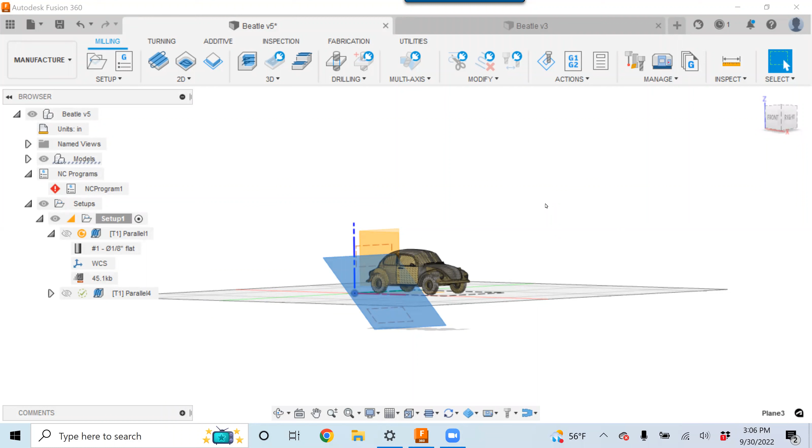So what we are going to be looking at today is finishing off some of the tool pathing that we created a couple weeks ago on this VW Beetle. The last session was on 3+2 machining, and we are also going to be looking at 3+2 machining today. The difference is a couple weeks ago it was only on work planes that already exist, not off on different angles. So we're going to learn how to put in a work plane like this and then constrain tool paths to only get within a certain area.

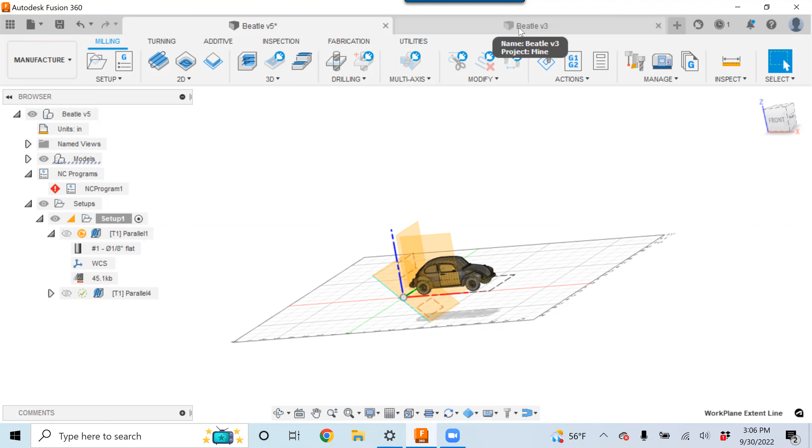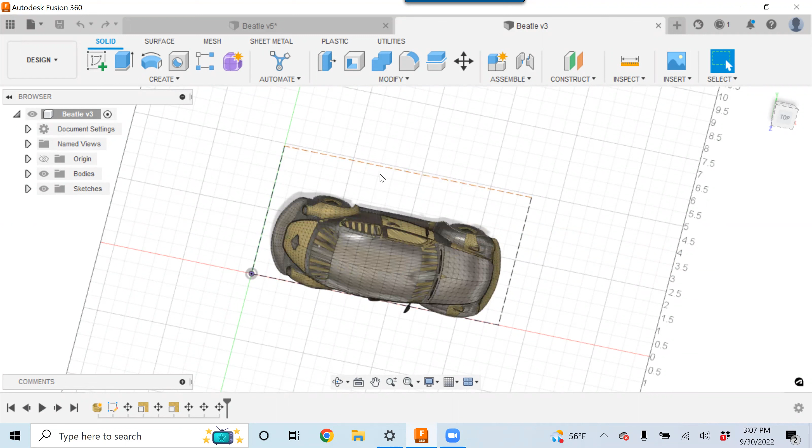Before we jump into learning that, I'm going to come over here and look at what we did two weeks ago and kind of refresh. We started in the design process on the design window. We sketched out a box on a sketch, and that is a construction sketch, used so we could scale the 3D model down and get it to fit within a size that we expect it to be.

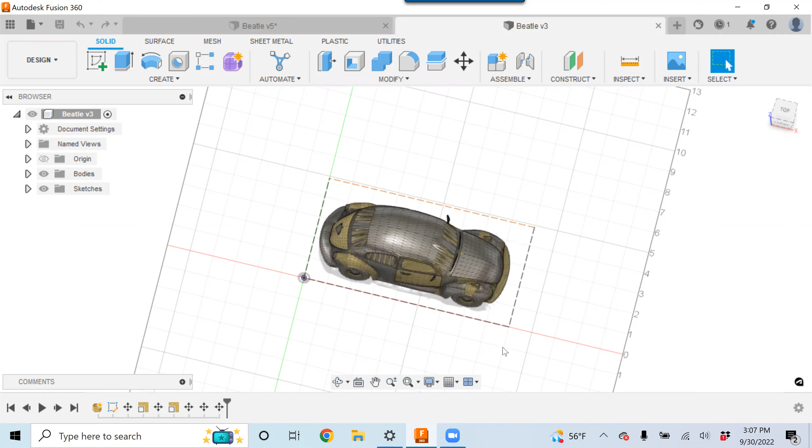When we brought this model in, I think it was full scale, so we shrunk it down using Modify. Under Modify, there was Move and Scale, and we stretched that down to fit. We then moved it into a position closer to XY0. Not that we have to do that—it's just nice to have it in an orientation closer to 0 for when you're panning, moving around, and rotating.

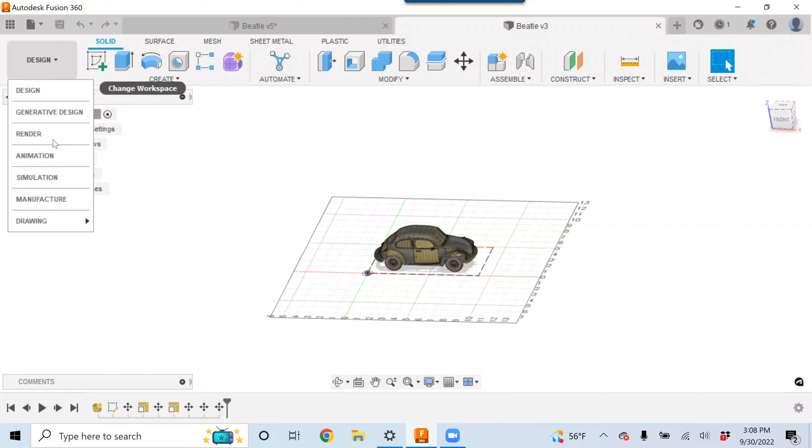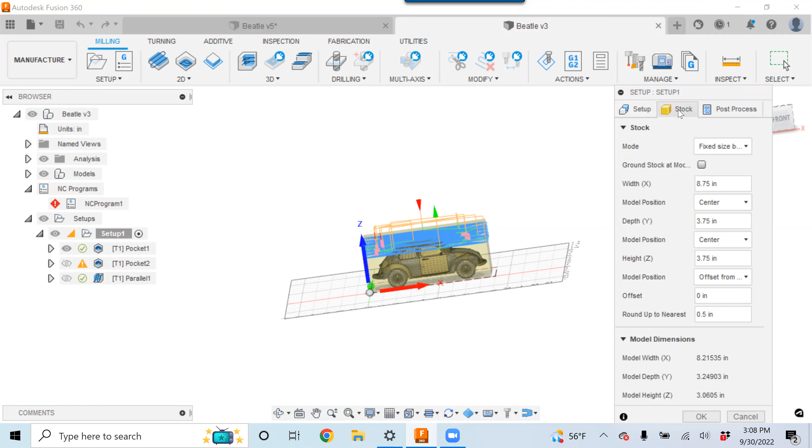Once this was brought in, sized and moved to the correct location, we jumped over into the manufacturing aspect of Fusion. This is where we added the setup—the material we're going to be cutting, the stock size. We're able to change a few things; the stock is primarily what you're going to be working with in the setup. Then we went in and created a couple different tool paths for this.

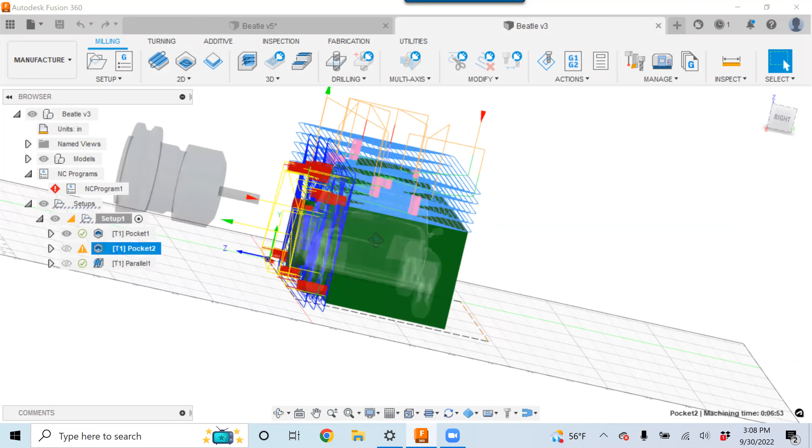We did a top-down pocketing roughing toolpath, which basically roughed the cut out. Looks like we did the same thing for the side. Then we did a parallel finishing, and I can see that finishing right now probably didn't give us the smoothest cut, because I'm able to see the spacing of these lines, which is what's going to give us the resolution. These blue lines are where the center of the cutter is going to follow.

We do have the simulate feature under right click, then simulate, and go ahead and hit play. We'll see what this looks like when it is done.

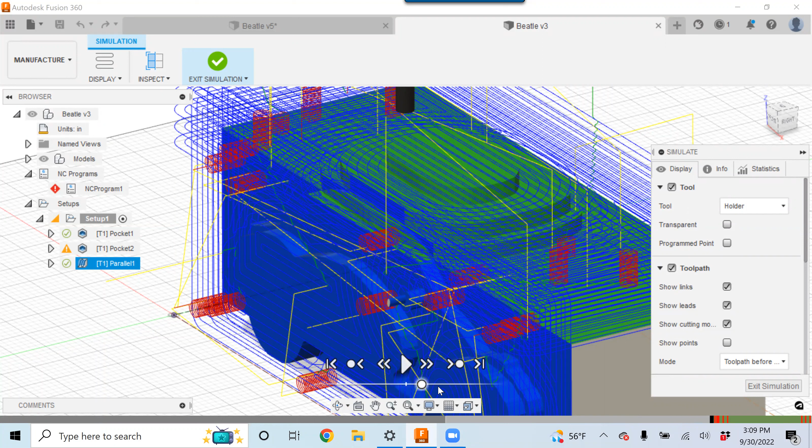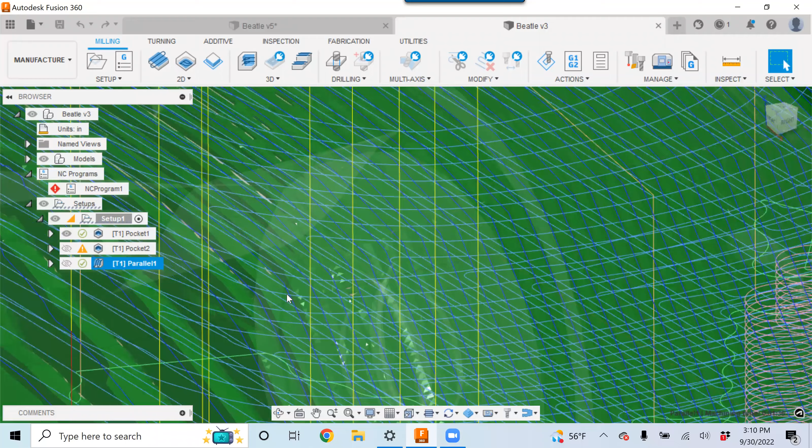Let's see if we can still see it with it turned off. No. So you can kind of see it a little bit—we're getting gouge marks, and it's just not very smooth. That is done within the step over of the tool path. The tighter these lines are together, the smoother the overall finish is going to be. Typically, you want to make that 8 to 10% of the diameter of the cutter.

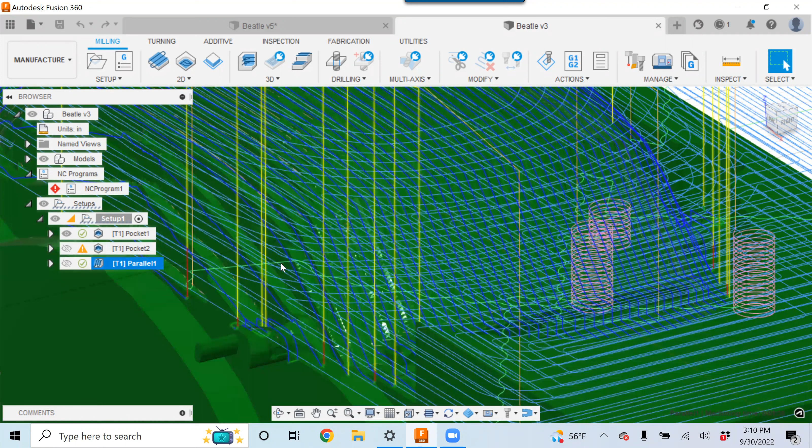So to change that, we're going to double click in the parallel finishing to open up our settings here. We have the passes, and it is the step over right here. We're cutting with a 1/8 inch cutter, so it's only stepping over like 50% of the cutter. We want to get a much smoother finish, so we'll go 10 thousandths.

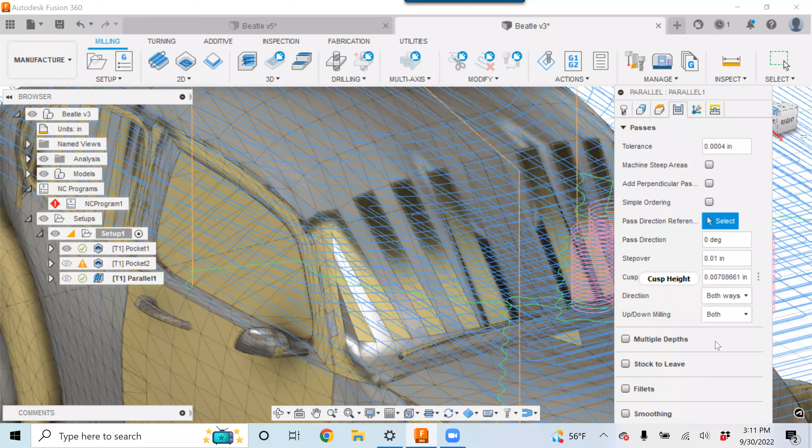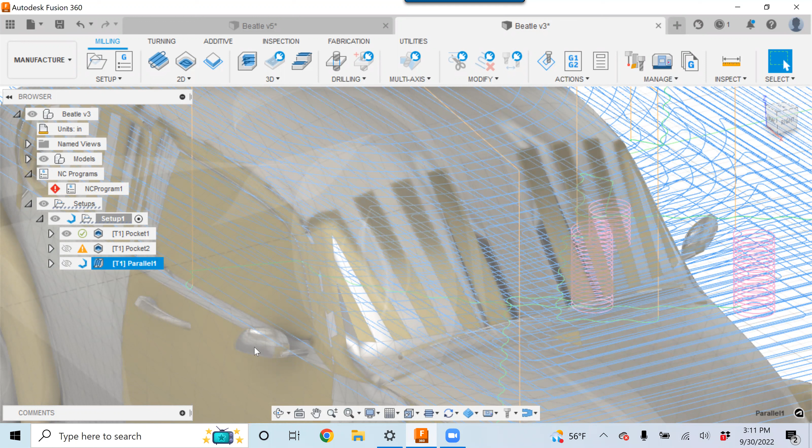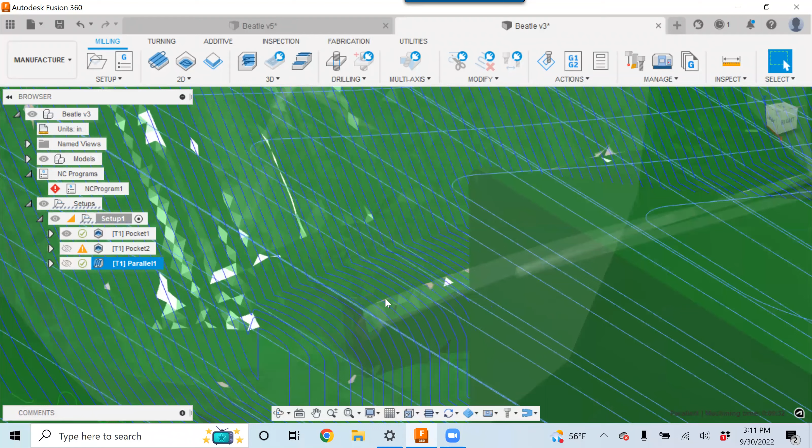We'll say okay to that. It's going to take a little bit longer to calculate, and by putting that closer together, it's going to take longer to cut, just because there's going to be a lot more miles that the machine has to travel to get a smoother finish. So there's a trade-off between how long it takes to cut versus how long you might do some handwork on it. Now we can see those blue lines are very tight together, which is going to provide a much smoother, cleaner look on the toolpath.

So let's see if we could simulate this. There's probably a way through one of these visual settings to hide the actual toolpath lines, but a couple things I want to point out: it's much smoother across the face over here, but as it came up across the side, we have a lot of steps created here.

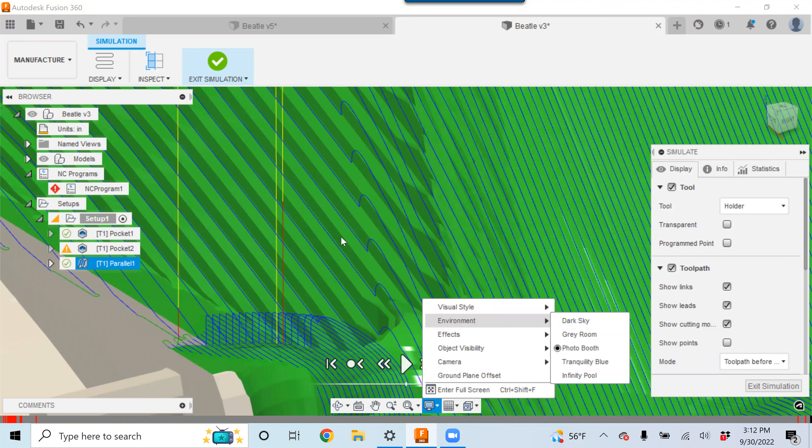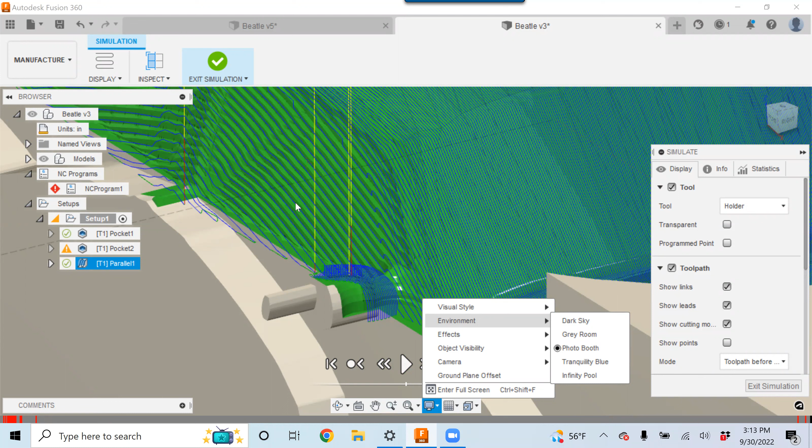Those steps are only 10 thousandths of an inch between this step and that step, so a quick sand would probably take care of that pretty easily. But the reason we're getting these steps up here and not across the face is we are using an end mill, not a ball nose, so we're getting a stair step effect as it travels up the side of a vertical wall. If we used a ball nose, we would get a smoother finish across the vertical walls here.

We might possibly get more of a scallop across the horizontal roof in the face of the windshield. The reason for that is the end mill is using more of the leading edge of the cutter rather than the ball nose just using the very tip of the cutter. So depending on what type of orientation you're rastering in, you'll get a smoother finish than the other.

For example, if you're going forward and backwards across the side of the vehicle, traveling from driver's side to passenger side and back, we would get a much smoother edge, not stair-stepped along the vertical walls on the sides of the vehicle. But coming up the windshield, we would get those vertical stair-stepped type of lines.

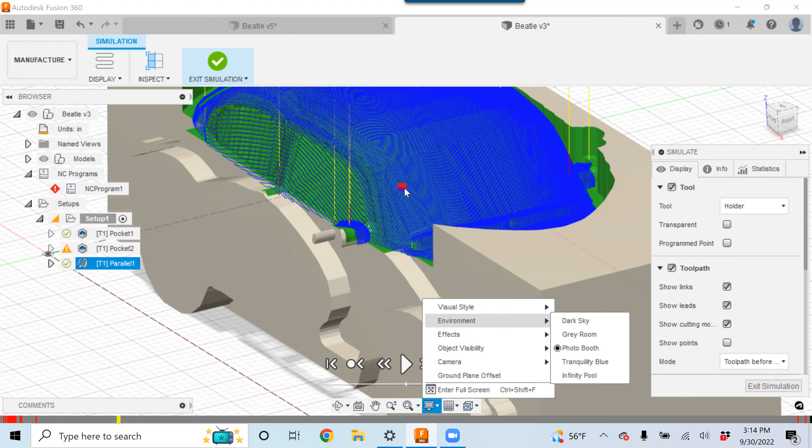So don't always think that a ball nose is the best option. Sometimes an end mill works very well for creating a tool path on an angle, especially since we have the ability to change the approach plane of the cutter.

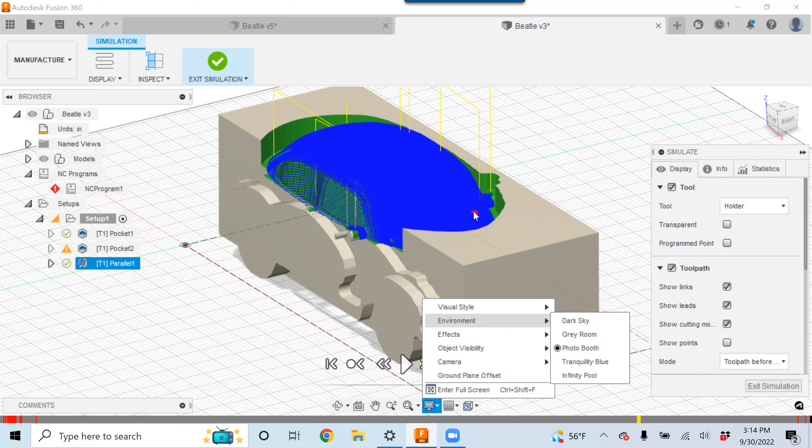What we're going to take a look at is how to create a plane across the front windshield and also create a 3D tool path on that angle if we used an end mill that's keeping the flatter surface of the model in the same orientation that an end mill might be.

So I'm going to exit the simulation, and to create a work plane, there's several ways of doing it. The way I go about doing it is going to the design. And right now we don't have any of the views turned on.

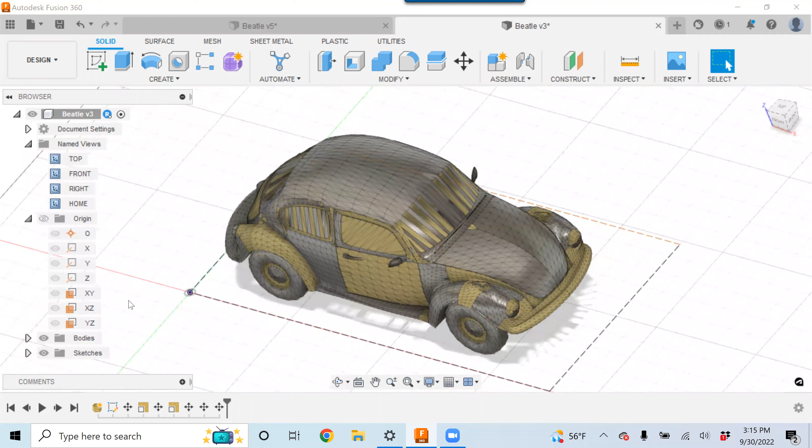So this is the X, Y, and Z planes that are showing up. And what we want to do is create another plane that is off on an angle to one of these. We are able to do that by going into construction and then plane at angle.

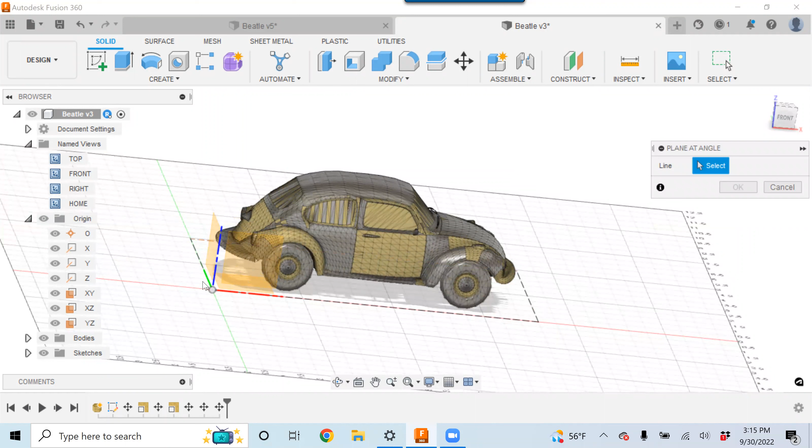It's wanting us to select an axis or a line to create a plane on the angle at. So if we select this Y axis here, it gives us a plane, and then we could use the rotate here to view that. I'm going to click on front, and just kind of rotate this around to somewhat match the angle that we have on the front of the windshield.

Or if we wanted to do it across the backside, setting it on that angle there for the backside. And we might go ahead and do both.

Yeah, all right, sorry about that. Put this on pause for just a second, I forgot to turn volumes down.

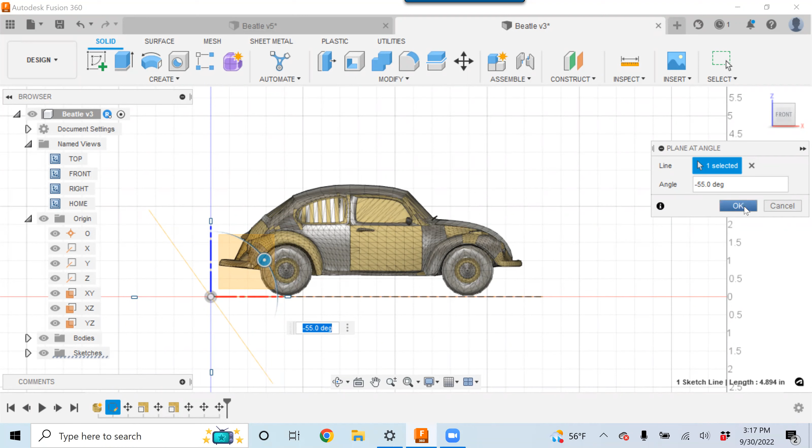All right, so now that we have this plane on the angle that's somewhat matching the windshield here, I'm going to go ahead, okay. I'm going to just make a mental note that it's also at a 55-degree angle. And we'll say okay to that.

Now that has given us a work plane that we're able to use to create a sketch on top of. So to create a sketch, I'm going to select that plane. You don't have to select the plane first, there are two ways of doing it. I usually select the plane first, then come up to create the sketch.

And it just kind of rotated that around to where the sketch is the horizontal plane now. This is the orientation that we are going to align the Z-axis to, so we were able to cut essentially straight down on it as if we rotated the model itself on the machine. You'd be able to do a very similar thing on a 3-axis machine, where instead of just reorienting the work planes as we're doing, it is the same as re-indexing, taking the material off and rotating the model on the 3-axis machine and doing it again in 3-axis motion.

So I do want to create a toolpath to only cover the windshield section. And to do that, with that sketch activated, I'm going to come up to sketch out a 2-point rectangle.

And for the line type, I'm going to set that to be a construction line, and just come in and sketch out a rectangle based on the size of the windshield.

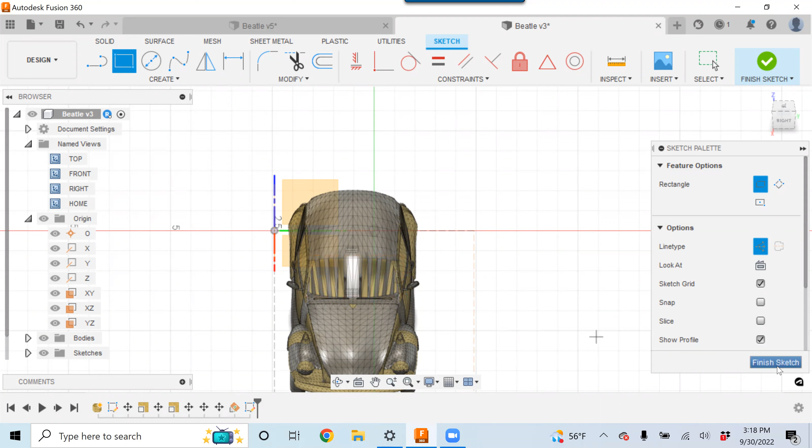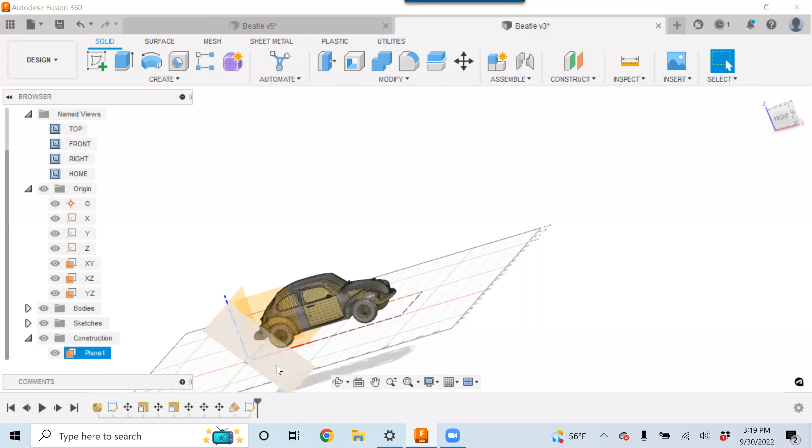Basically that is going to become the containment rectangle for the toolpath that we're going to create. So that rectangle is created down below on that work plane that we have just created, and that is found under the construction options here. We could see that there, that is the rectangle that we just drew that is matching up to the size of that windshield, or roughly that size.

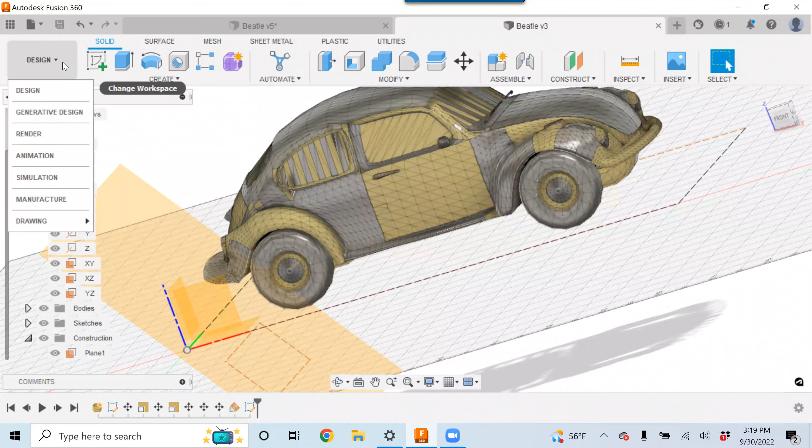So once that is done, I always like to come up, file, save, just in case something goes wrong. So back into design, manufacturing.

And we're able to now select that work plane to create... got a mouse button that is stuck, sorry for that.

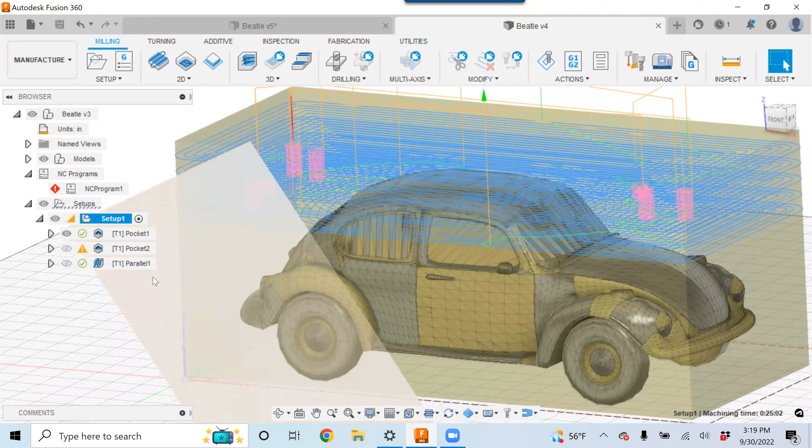To use to set the angle of the Z to the work plane. So we're going to go ahead and create a 3D parallel finishing. This is the same one that we just modified the finishing for and created that step over closer together.

The first thing is going ahead and selecting the tool, which is already a tool selected there from a previous job in the tool database. As I mentioned in the last video, the overall length is a critical real number that you're going to have to get off the 5-axis machine by running the routine called get tool length, and then enter in that overall length here. That is what tells the machine how far X and Y need to be offset based on the angle of the Z to still know where the end of that tip is in relation to the model itself.

So with that selected, you could come through and set up your feeds and speeds. That is really nothing different than you would have on your 3-axis machine, so kind of run the same speeds that you would on a 3-axis machine.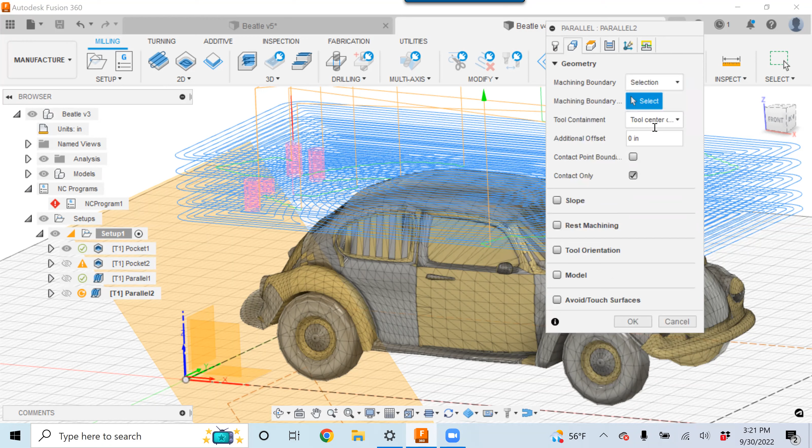Our next step is to go to the geometry, and we have a machining boundary. Right now it's set to silhouette, and we are going to do based on selection—the rectangle that we selected. Notice how it projected a green square off of that, and the reason for that being offset and looking much smaller in the X than what we sketched is that the Z is still seeing it from the top down. That is the width of what it would machine if we're machining from the top side down, but we do need to change the tool orientation to match the work plane that we created.

That is found under tool orientation, and there are a couple ways of doing this. One, right when we clicked on that, we have this option here to rotate this around, and notice how that green line also is coming up and matching up to the line that we rotated. Remember when I mentioned making note of that tilt angle, that's matching 55 degrees. So we could have just come in here and put 55 degrees without necessarily drawing that angle or work plane. Or, since we have that plane, I know that sketch is on that plane and at that angle, so we could just come in here and select the work plane, and we can see that it automatically aligns itself to that plane, which is an angle of 55 degrees.

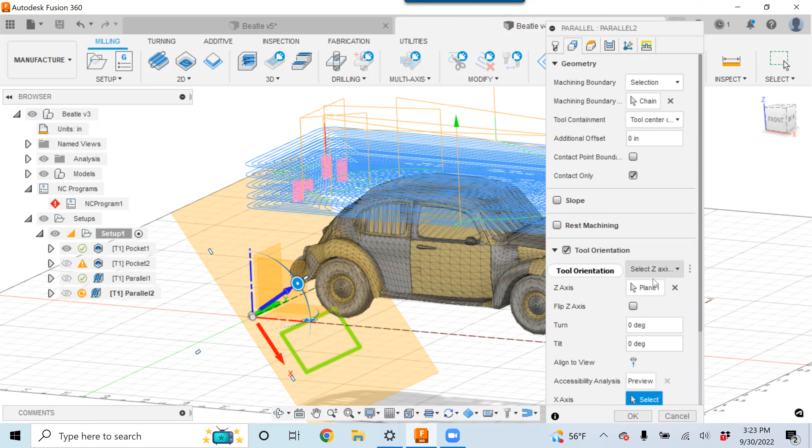Even though it says 0 here, that's because we have it set to the plane rather than rotating it around. Again, the arrow of the Z-axis is pointing in the direction that the Z would be approaching from—it's not the direction that the Z is moving. So the Z is coming from the top to the bottom. There is an option here to flip the axes around, which in this case could result in a possible crash because the Z would rotate around, tip up the A axis, and orient the B axis accordingly. If your model is not elevated up off the table enough, the head could come down and crash into the table surface. So pay attention to where that arrow is pointing—it is pointing to the direction that the Z is coming from.

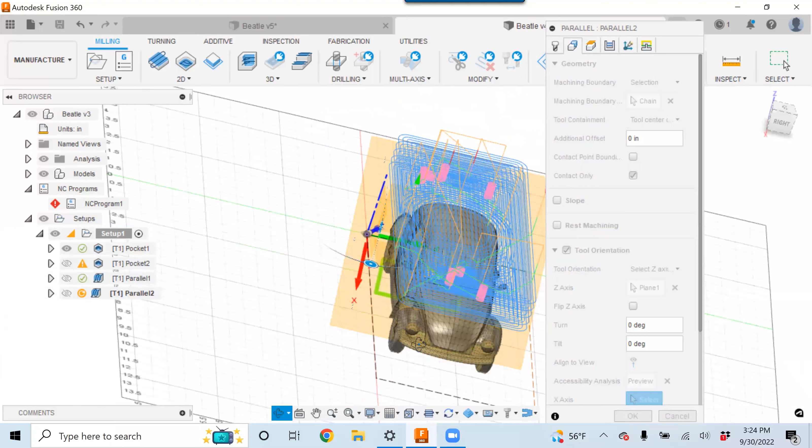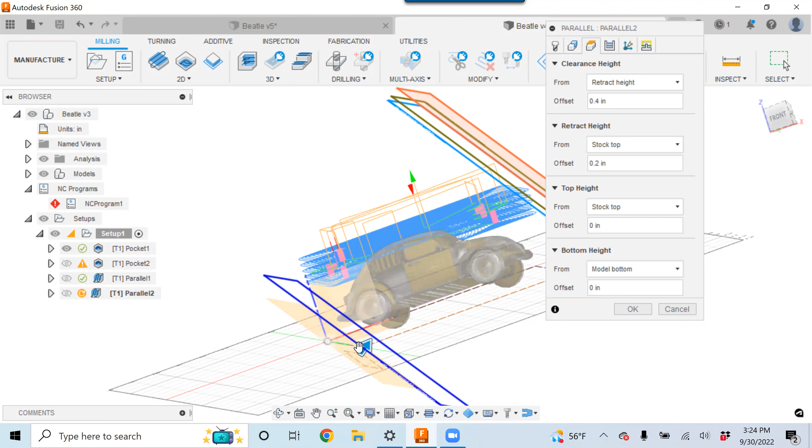We can now see that that green rectangle has gotten a little bit bigger for us to use to finish out the tool pathing. So the heights is the other thing we want to come in and do. Right now, this blue line is where it's going to completely cut down through and try to get to. In the relationship of where we drew this rectangle, it can't get there anyway because the windshield and the rest of the model is going to prevent it from going down there. So we'll just go ahead and click OK—we'll come back into this, but click OK just so we can see what's going to happen here.

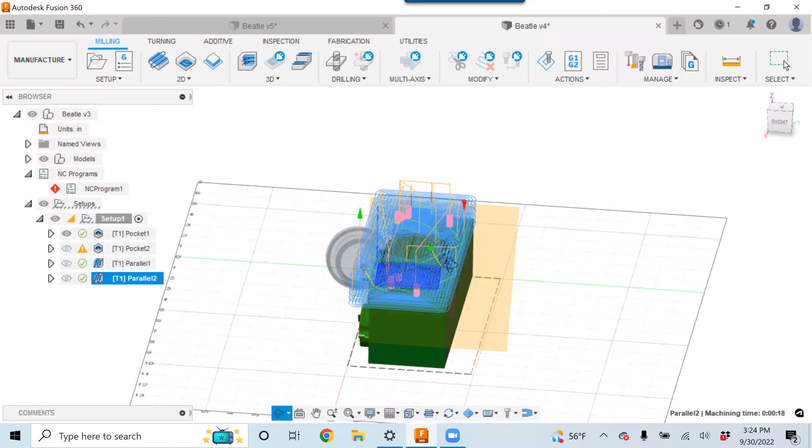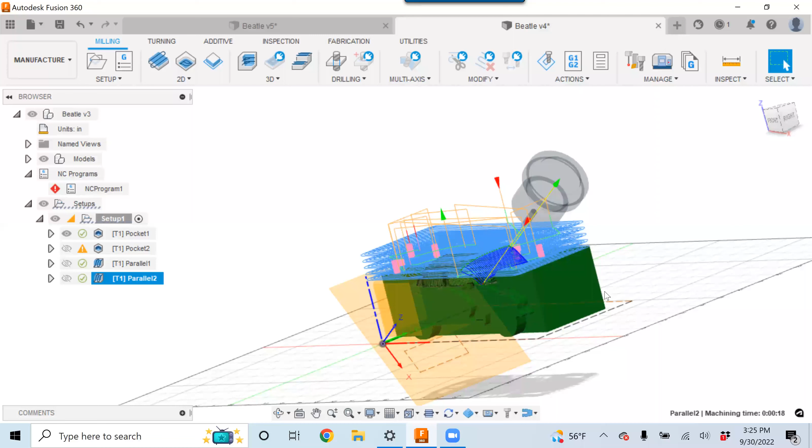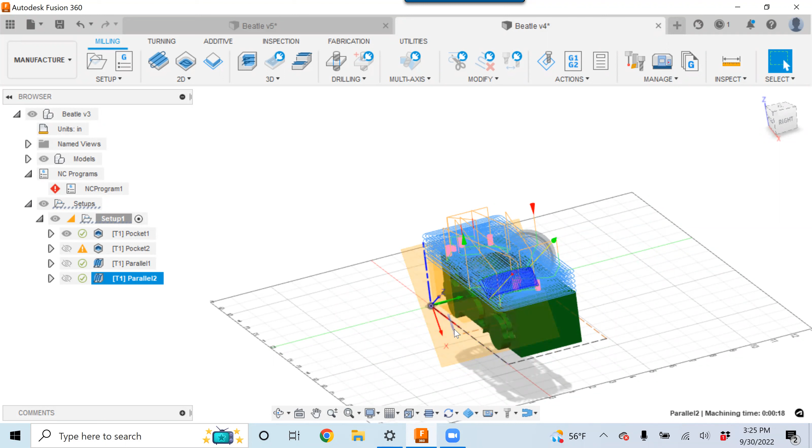So it still only did the windshield, and the reason why it did not go completely down to that blue cutting length is because of the way that we drew that boundary rectangle in—we did not go wider than the model. Now, if this rectangle on the back side was much wider, then it would try to come down through the sides all the way down to that cutting plane. So even though we are contained within that rectangle, it is still a good idea to set that cutting plane to a set height, just in case later on you modify that sketch and it does come out farther—it's an opportunity to mess up, cut too deep, and have a collision with the collet as it's trying to get down there.

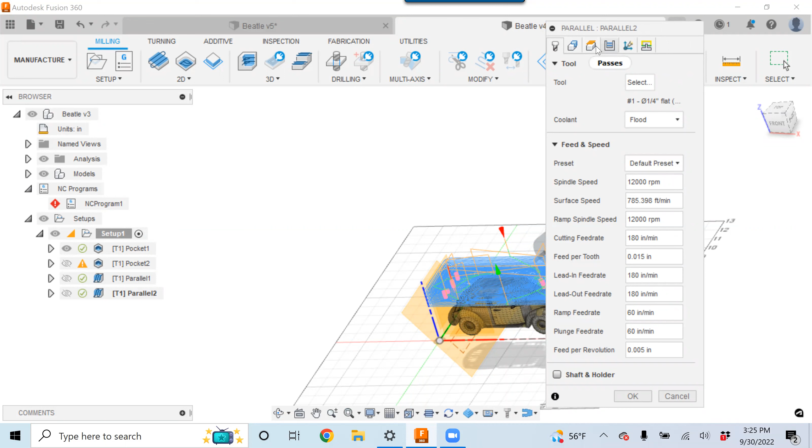So we will do that by double clicking on the tool path here, which opens up the same parameters that we were just using, and coming to the heights, and I'm going to view it from the front, which is really the side of the vehicle.

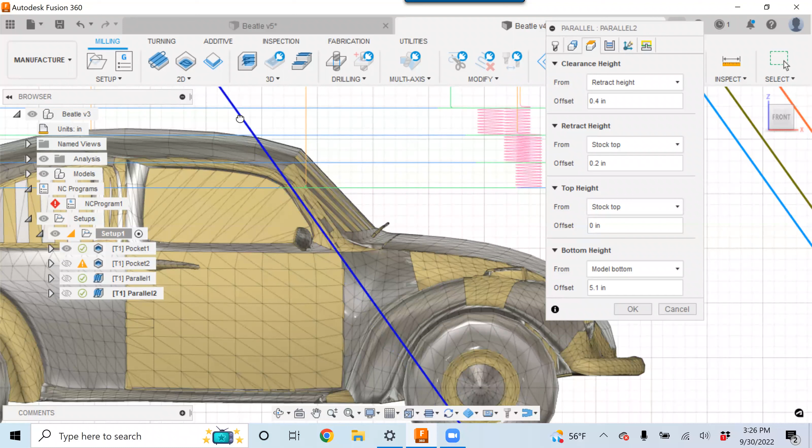We could bring this cutting plane up to an area that is not going to have any possible collision, just in case we messed up and reoriented that cutting plane. Come over and also look at our passes, and that is our step over. I'm going to go ahead and reduce that back to 10 thousandths. With all of that done, we will say okay.

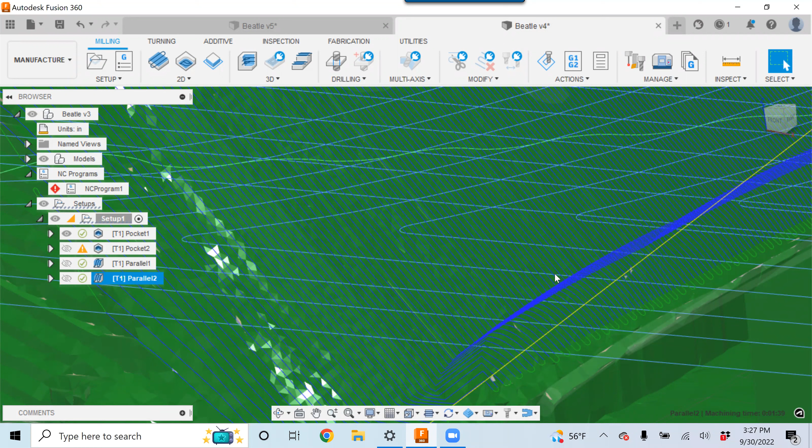So that gives us a much smoother finish across the top of that windshield. Even though we are using an end mill, with the orientation that we are cutting, where the majority of the windshield is going to be flat and in line with that bit, that is going to give us most likely a smoother finish than if we were using a ball end mill. So even with a 1/4 inch bit diameter cutter, we will still be able to get this model very smooth in this orientation. Now, the bigger the diameter, the less detail we might be picking up, but the smoothness is going to be there.

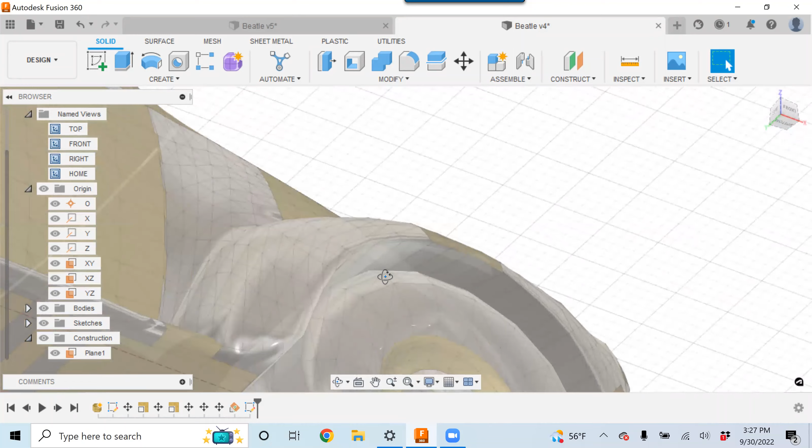Take another look at maybe getting up underneath the wheel well a little bit. So we're going to jump over into the design and just see what kind of undercuts, if any, we have that we might be able to use. It's not looking like we have too many undercuts, other than we could set something up to come up underneath the mirror here a little bit.

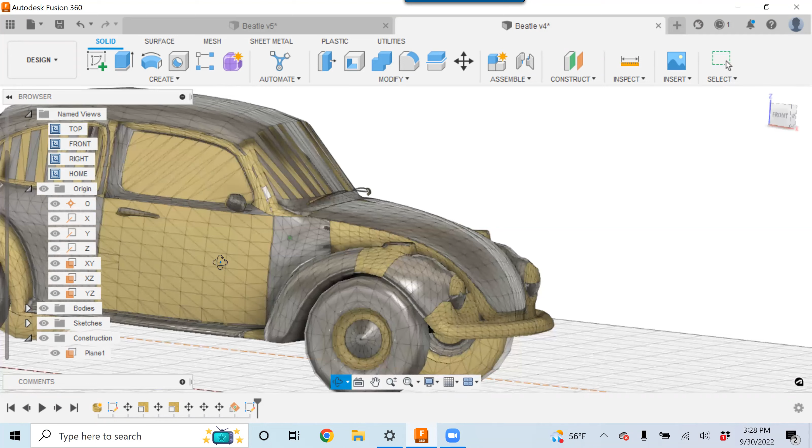And that is going to be done pretty much exactly the same way, creating a different work plane. So that is under the construction, creating a work plane at an angle.

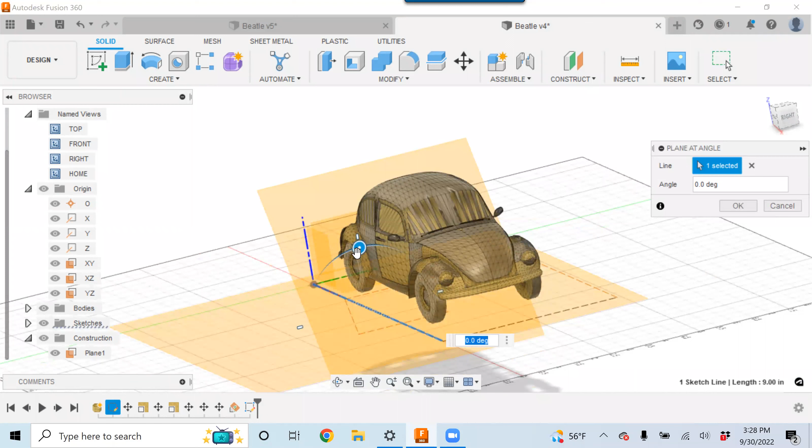And I'm going to go ahead and select, and again, rotate around. This time I am looking at an angle that the approach is going to be from the bottom up underneath. So setting this to an angle, understanding that the YZ, or the A, is going to have to rotate up into this direction, and making sure that we don't rotate up too much. Otherwise, we will have a collision. So setting something like this could rotate, I think, around 60 degrees. We should be okay with that. And that is, yeah, we're good there.

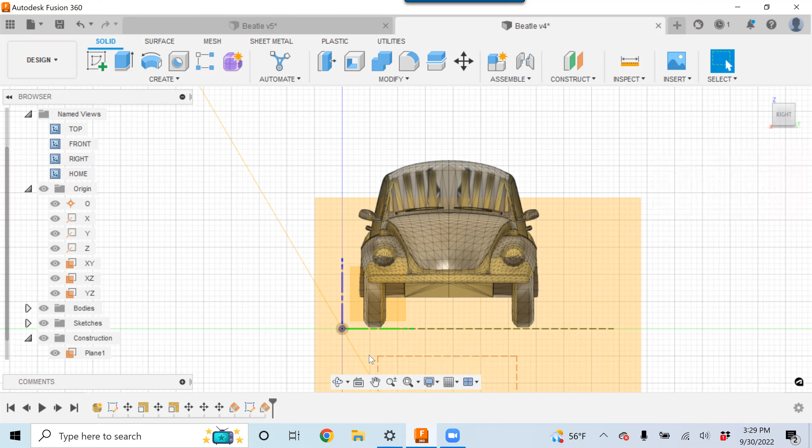So once we're done with that, I'm going to say okay, and drawing a sketch on that plane to contain the 3D model only around the mirror. And again, we'll use that by creating a sketch. The first time I showed selecting the plane first. This time we're going to say selecting the sketch, and now it's going to say, what plane do you want to sketch on? So we're going to select this backside here. We can see how that rotated around.

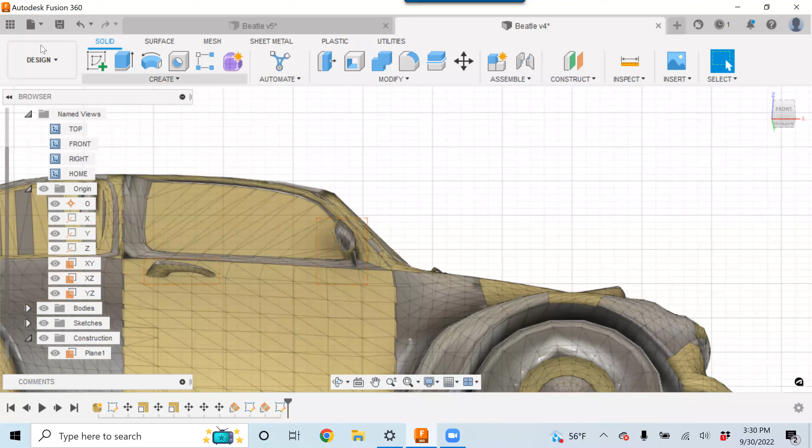And again, just drawing in a rectangle with a construction option set. We'll sketch out a rectangle for there. And I could see we could probably even get somewhat underneath of this door handle as well. So let's put another rectangle right there. Both of those set to construction options. We'll go ahead and finish that and then jump over into the manufacturing.

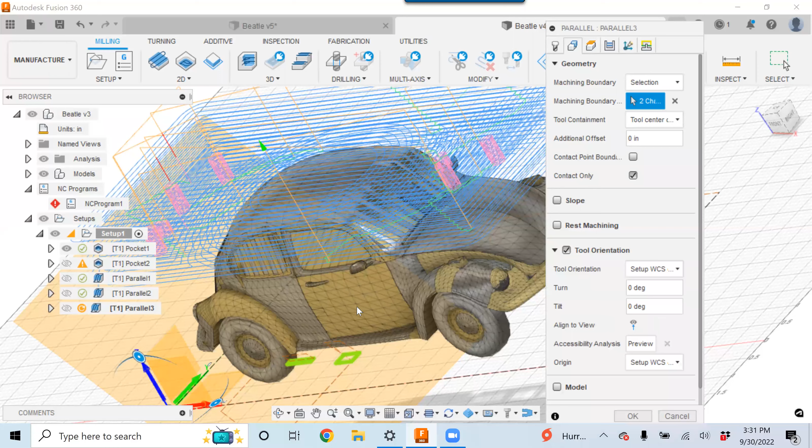And it is the same process again. So we're going to go to the 3D parallel finishing. The tool is still selected. The geometry, we want to do the selection. And I held the shift key down to select both of those objects that we drew, rectangles. One's for the mirror, the other is for the handle. Then our tool orientation.

The construction plane has been turned off. So let's go back into the design and turn that plane on.

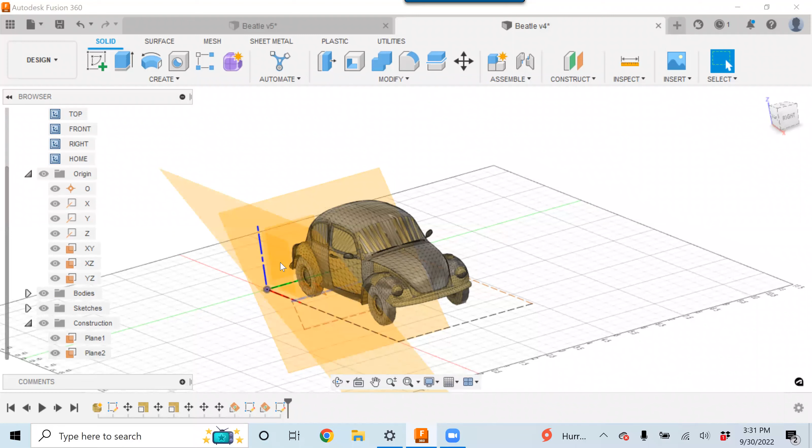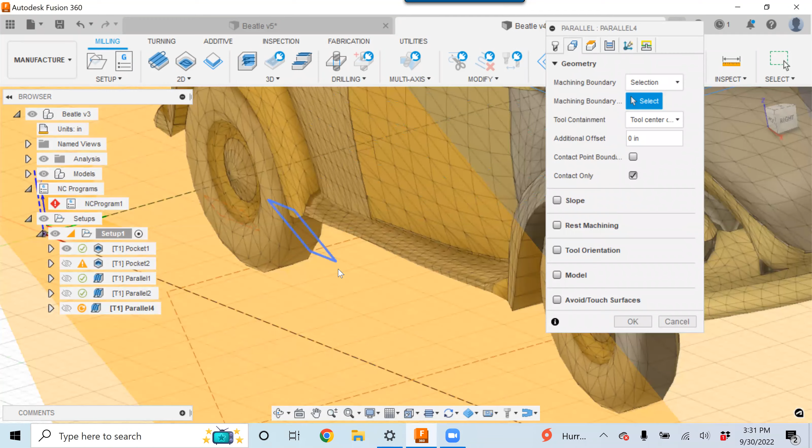3D parallel finishing, again, tool is selected. The geometry is going to be the selection. And then the tool orientation is going to be this backside.

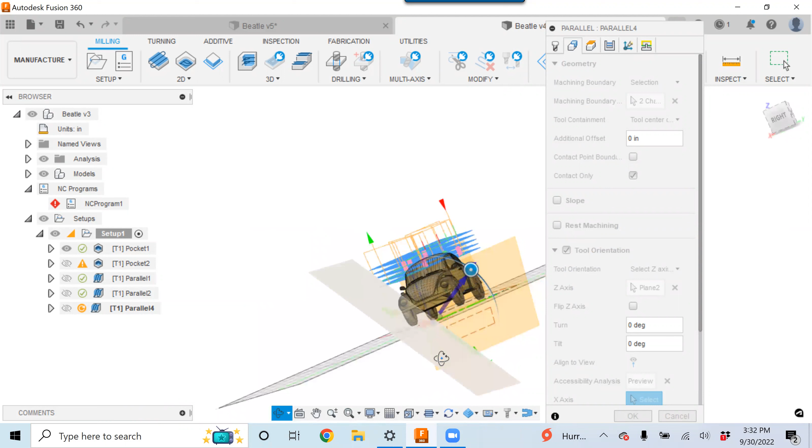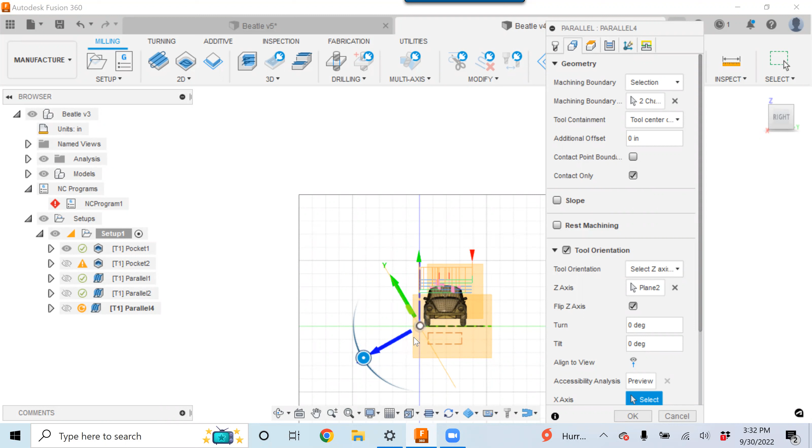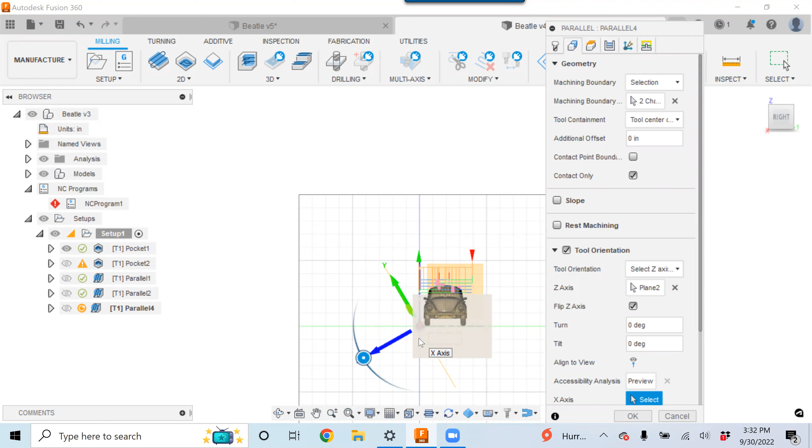And now we see the arrow on that Z is coming from this direction down. That is not the direction we want it to be. We want it to come from down below, up underneath. So we're going to flip the Z axis around, and this is going to create some undercuts. So the Z axis and the cutter is going to be pointing up in the air just a little bit, which means that you have to set the model up higher on a pedestal to allow room for the machine head to get below the model to allow it to point up. How high that pedestal needs to sit all depends on the overall length of the cutter. The longer the tool length, the farther down the Z will have to move to be able to get up underneath of that area.

So with that set, again, coming into the heights, this time the height is off to the right side. Selecting that is going to move that down above where that mirror is. Coming over to the passes and changing the step over from 06 to 01, and then select calculate.

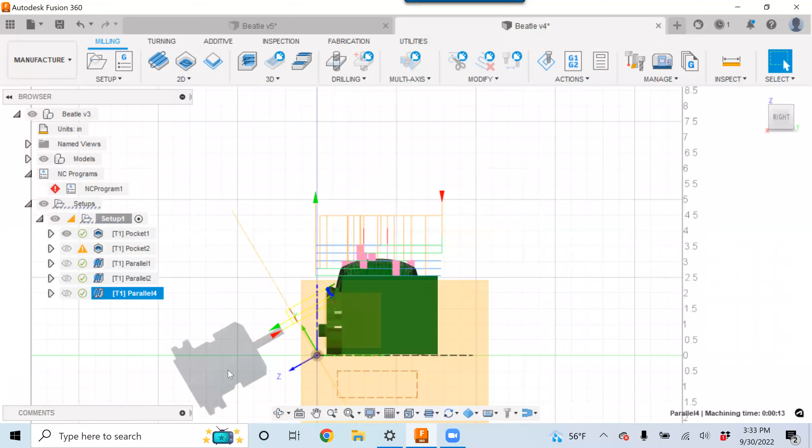So that gives us a demonstration of how that cutter is going to make an approach in at cutting and being able to make an undercut into a section. But again, when you're doing this or any 5-axis motion at any approach angle, you have to pay attention to what else is in the way of the head while cutting.

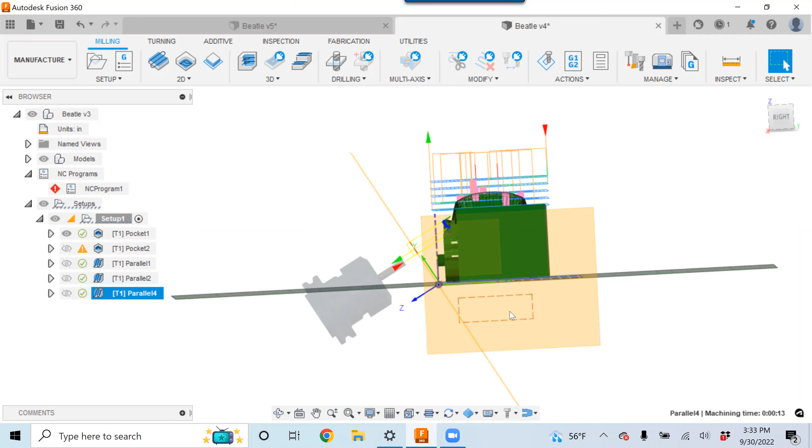So again, we could go ahead and generate a simulation of this.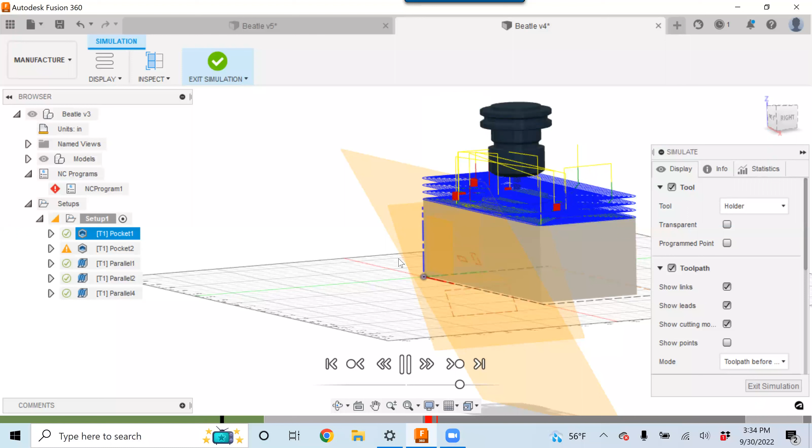So there was a collision that just happened. You saw that collet go red. That is a collision in one of the parallel finishing passes that we had, where we didn't clear enough material out somewhere, or we did not run the cut depth to the right depth.

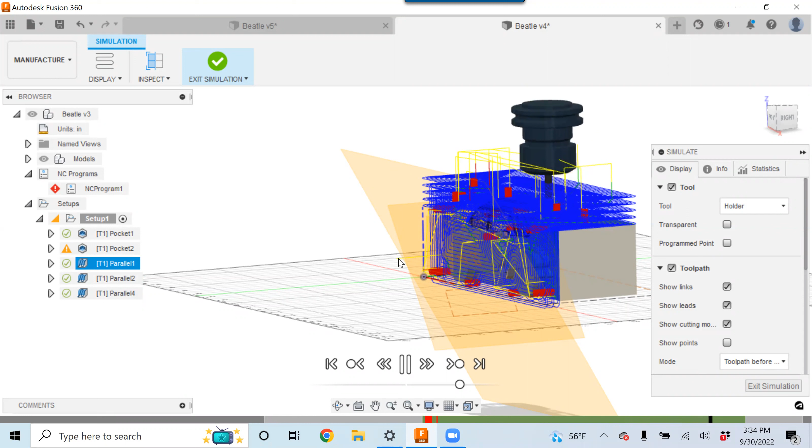There is the angle across the front of the windshield, and then the undercutting from underneath.

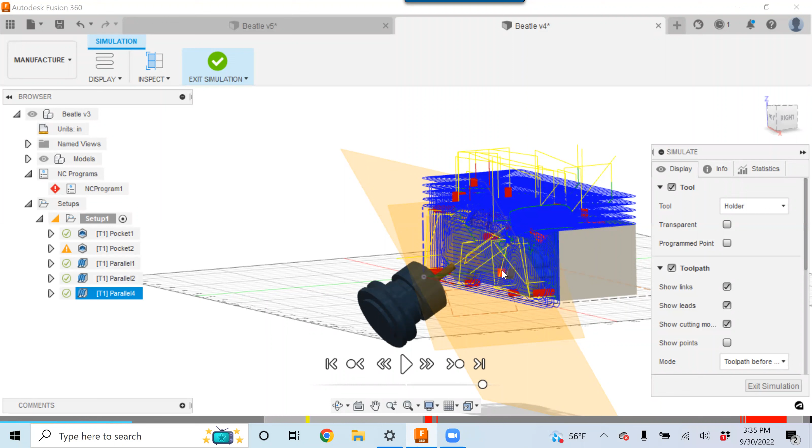So we're going to take a look at what caused that collision. That seemed to be in this parallel finishing. It was somewhere around in this area here. So it was definitely this tool path that I think I saw the issue in.

Nope, got to exit the simulation first.

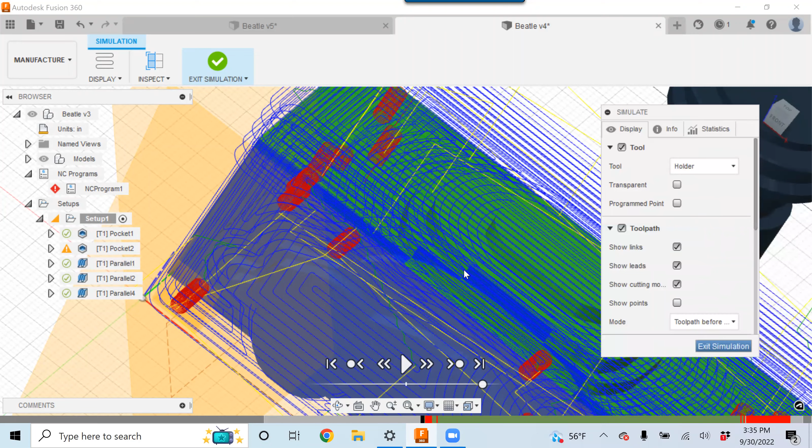So I have all of the tool paths turned off, and there's a little eyeball here that we could flip on, which should be presenting us with the toolpath.

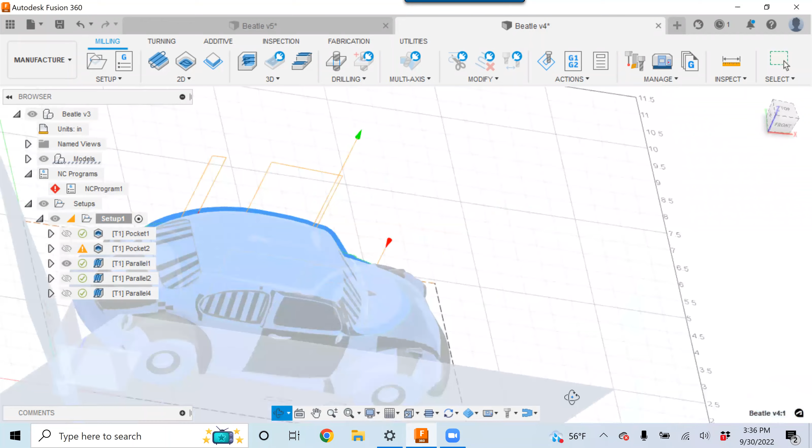And the collision probably came a little bit from hitting right in here, this depth. Getting down this far, the edge of the collet was probably hitting on the backside of the top, or the backside of the windshield here.

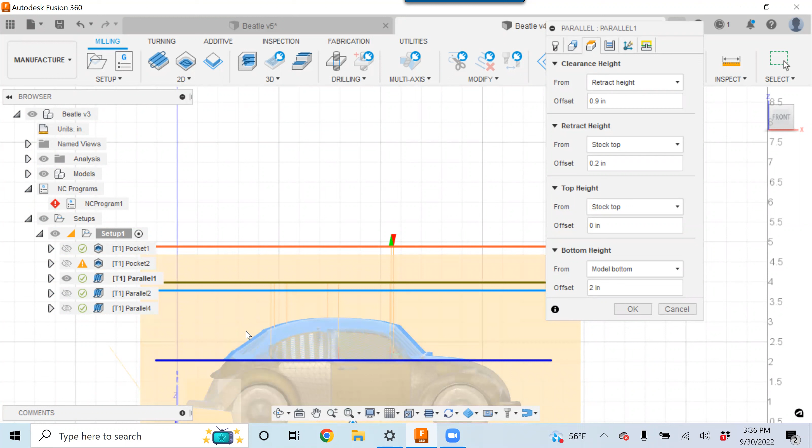So we would have to double click into the finishing toolpath here, coming into the heights and adjusting that bottom height up just a little bit. So again, when the bit would come down to this height right here, the collet nut is probably hitting right around in that area. So we're just going to change that, bump that up just a little bit.

And it's snapping in half-inch increments, so we could come in here and enter 0.25, moves that up, and then say okay to that.

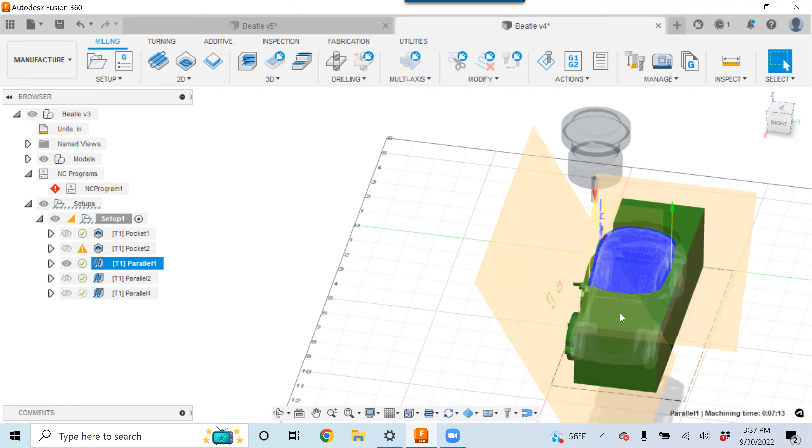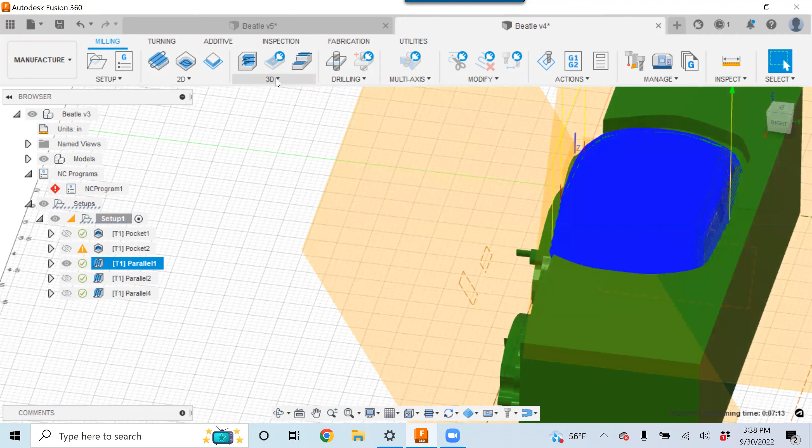So that is generally the basics to 3-axis machining. This machine move is really no different than a 3-axis move that you would do on a 3-axis machine. The only difference here is we are first positioning the A and the B axis, the wrist and the knuckle, to a set angle. Then we are doing 3-axis motion over top of that. So that is the reason we are using 3-axis machining versus multi-axis machining.

So I think that's kind of what I had to talk about today. I know it's a little shorter than what we've had previously, so definitely have room for questions.

Let's see. Hey Ryan, can you hear me? I can. Okay.

I noticed that we always use the rectangle when you're drawing the sketch for the plane. Is it best to just stick to that, or can you use something more, is there any way to use like a curved plane?

Yes, you could do a curved plane just the same way. I was just drawing out a rectangle because it's quick and easy. But yes, if you wanted to completely outline the edges and contain it based on a curve or an unusual shape of whatever, you could do that, yes, absolutely. To the machine and to the tool pathing, a straight line really is no different than a curved line. It's going to all behave exactly the same way.

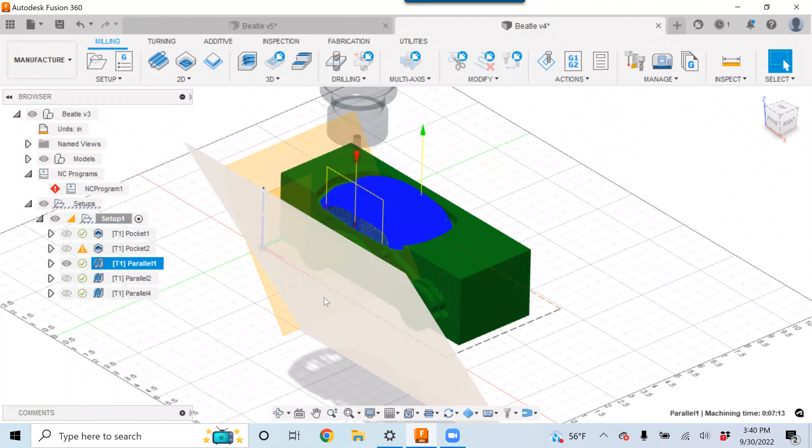Yeah, and maybe the others can chime in and we can all review this and play around with the machine before we have another session. Yeah, that would be good. If you could get some time on the machine, that'll give you a little bit of experience to know what you don't know. Exactly, yeah. And I know it's a lot.